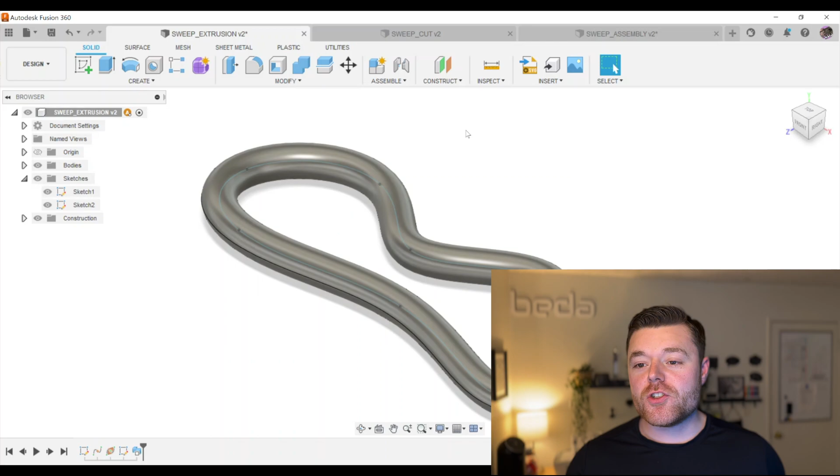For the first one, we're going to understand how we can use the sweep feature to create an extrusion. This is essentially just a simple spline that was created on a top plane, and then I created another plane along the path and swept a very simple circle feature.

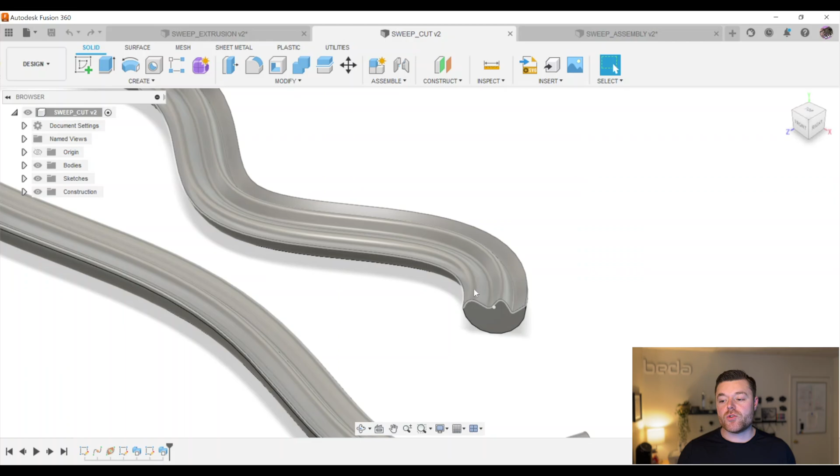We'll also learn, in reference to that extrusion we create, how to create an extruded cut along that same swept path. And then we'll end with something that's a little more complex.

This is just a Raspberry Pi enclosure that I pulled off GrabCAD. I'll leave the link down below in the description if you'd like to follow along. But you could assume that this is like a wire plug, and then we've got maybe a rubber piece or grommet that needs to go on top of it.

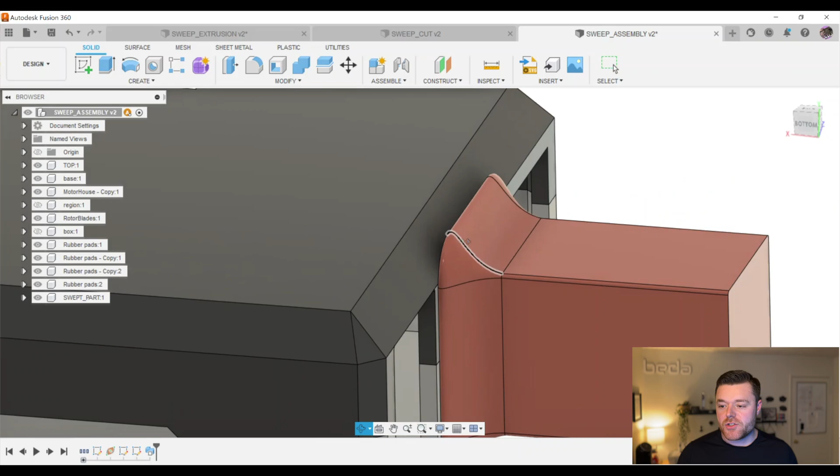But this feature was created solely using a sweep feature, so it could save you time in the long run if you needed to model something like this in the future. So with that being said, let's get started.

What we'll do is we'll go ahead and click New Design as always. We'll save this as 'sweep extrusion example.' And for my case, I'm just going to say YouTube.

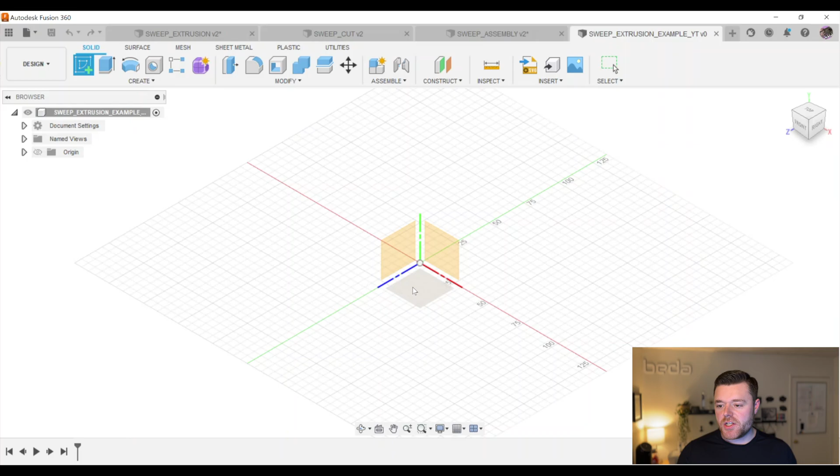And we'll go up here and left click on Create Sketch. We're going to left click on this top plane here. And we'll just create a fit point spline.

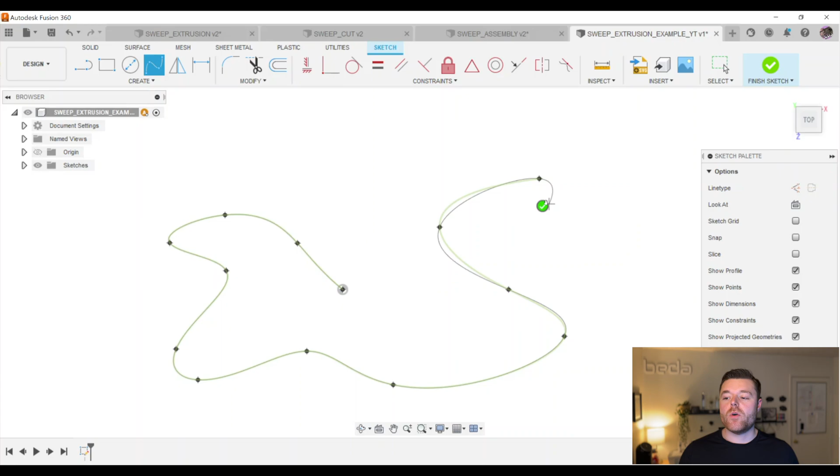So left click on fit point spline, left click on the origin, and we can just left click all around to give it some kind of direction that this sweep is going to follow, left clicking all the way around. Then when you want to finish, you can left click on this green check mark and hit escape.

Great, and we will finish sketch. So we've got this unique looking geometry here.

Now what we'd like to do is sweep a feature along this path. So this spline that we've just created is essentially a path that we will then reference. In order to do that, we need a plane to reference.

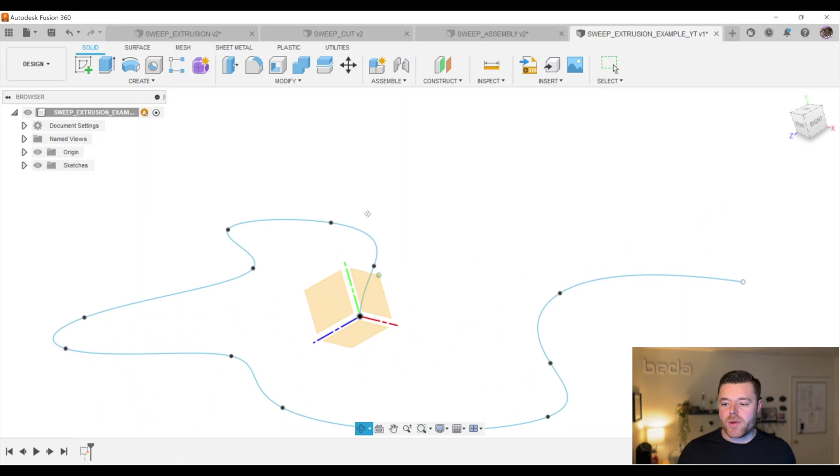If you show your planes, you'll notice that these planes, at least the top, front, and right planes that we have as our origin, aren't actually normal to the path that we have just created. That's on purpose, so that gives us an opportunity to learn how we can actually create a plane normal to the path that we have created.

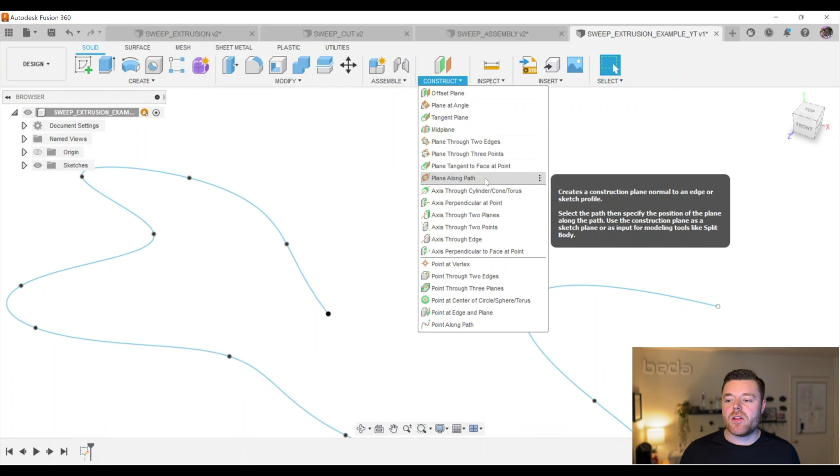So let's hide the origin. We can go up here and left click on Construct, under Offset Plane. Don't select Offset Plane, but there is a selection here that says Plane Along Path. So we'll just left click that, and then the path that we want to reference.

Then it gives us options - you want to keep tangent plane selected, keep proportional selected, unless you want to create a physical distance. For this purpose, we'll just keep it at proportional.

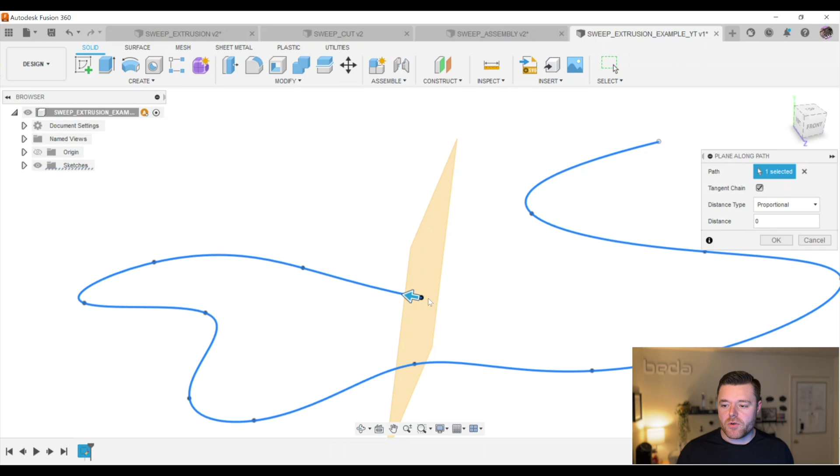At distance, let's just make sure that this is 0. What that means is it's just going to go right to the starting point, and this is going to be normal to the beginning of our path, which is perfect. So we'll just select OK.

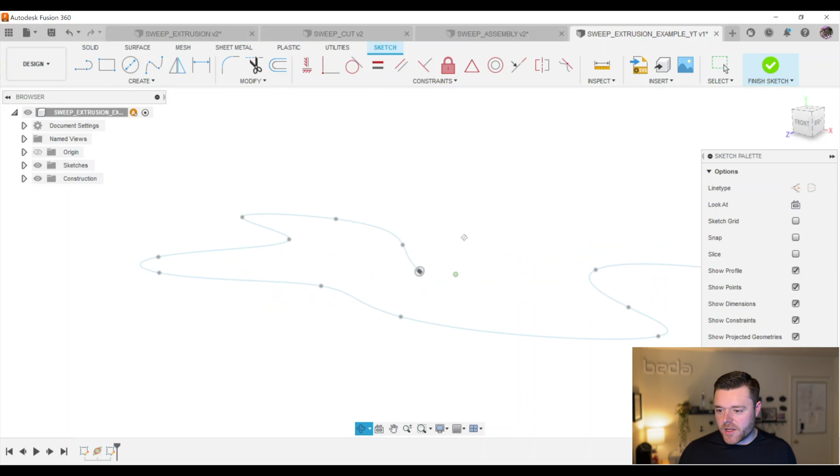There we go, so this is going to be our sketch plane. So we will left click on this plane and then left click Create Sketch. And then if we do Shift and middle click, we can kind of reorient the sketch just to make sure we're referencing the correct view of the sketch.

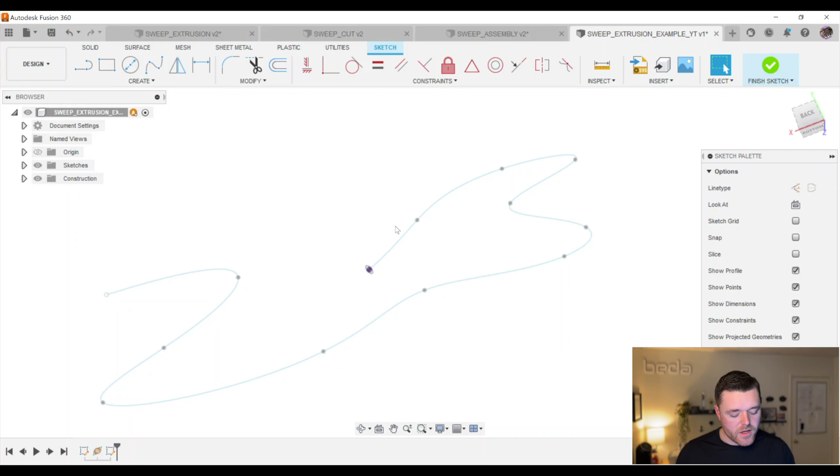And what we want to do is just do P for project, and we're just going to project the point and select OK. For the purpose of this example, we'll just do a circle.

So we can do C for circle right at the origin. And if you can't select it because maybe you've rotated it so much, you can just do 'look at' - go to your construction, select the plane, and then you'll look at it.

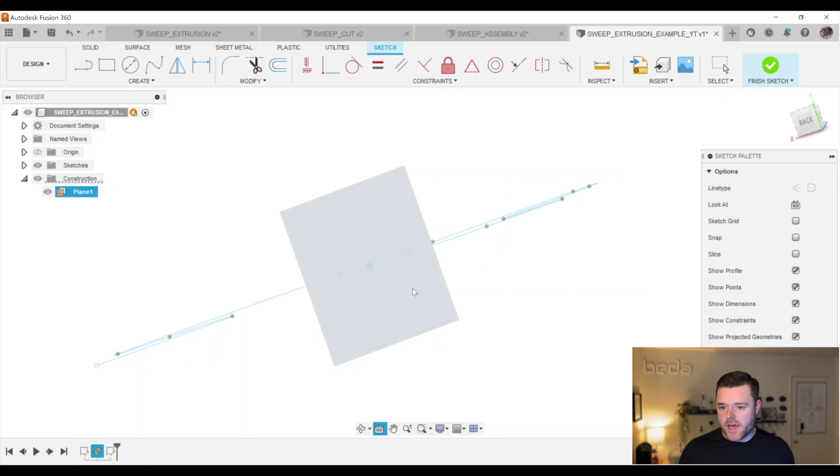Look at the plane. Okay, there it goes. So look at the plane, and you should be reoriented normal to the face of the sketch. C for circle, left click on that point, and we can just make it, left click again, escape.

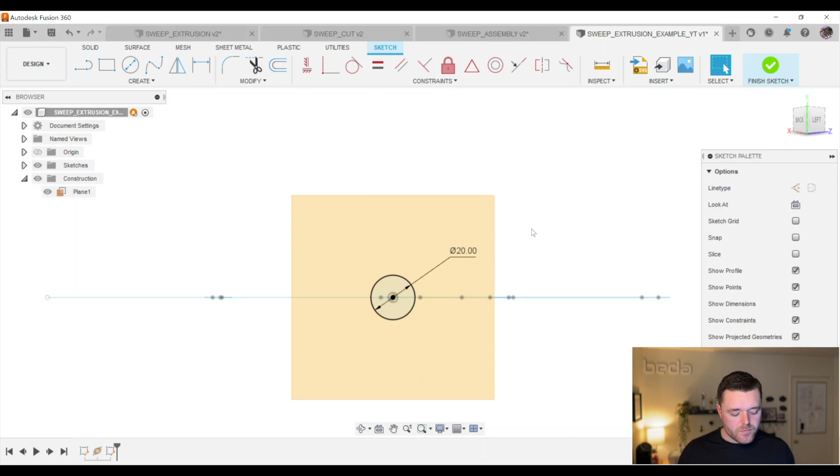D for dimension, we'll just make it maybe 20 millimeters. So I left click on the circle to get there, 20, then hit enter and escape. Shift middle click, and we can hide the plane. Over here in construction, we can just turn construction off.

And we've got the circle. So if you can visualize this, what you'll see is this circle will basically sweep along this entire path. Pretty neat. We'll left click on Finish Sketch, left click on the circle so it's shaded.

I almost clicked Extrude. We will click Sweep, and then it gives us a couple options here. So we want single path to be selected. We want the profile—we've already selected it, but if you had not, you could select your profile and it would say one selected.

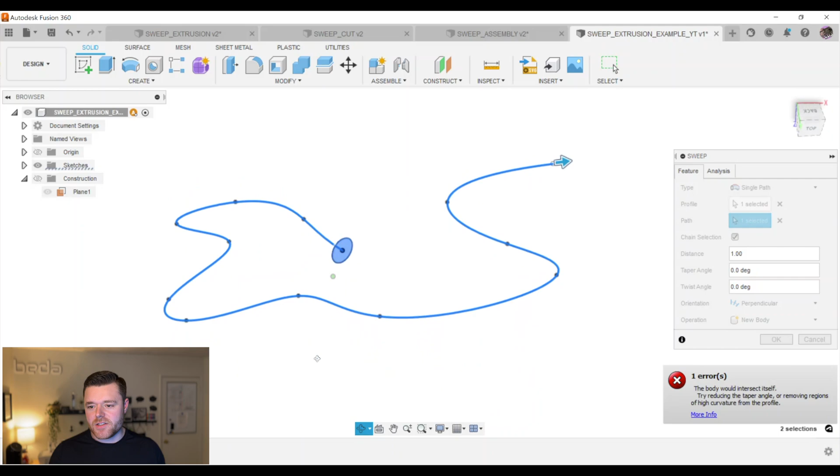And then the path we want it to follow is the spline that we just created. You know what, I'm actually glad this happened, because this gives us a real world example of what might happen to you when you're trying to create a sweep along a path.

This says it would intersect itself, and I'm guessing it's probably right at this part. So this means the diameter of the sketch we just created is too large, and the curves we're trying to make it follow are too narrow. This doesn't give us enough curvature in this turn to actually create a 20 millimeter diameter circle out here.

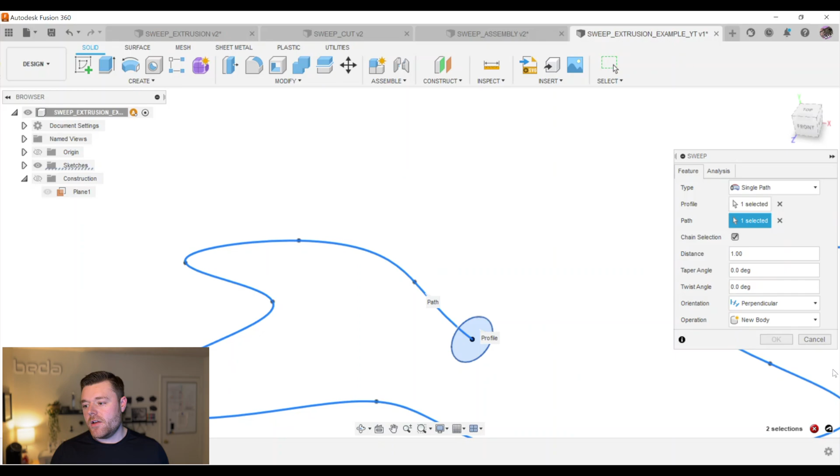So a couple things we can do. Let's press cancel, left click on cancel. Because these aren't defined, we can just move them—we didn't actually create dimensions for these sketches. So what we can do is not even enter the sketch, and move these organically.

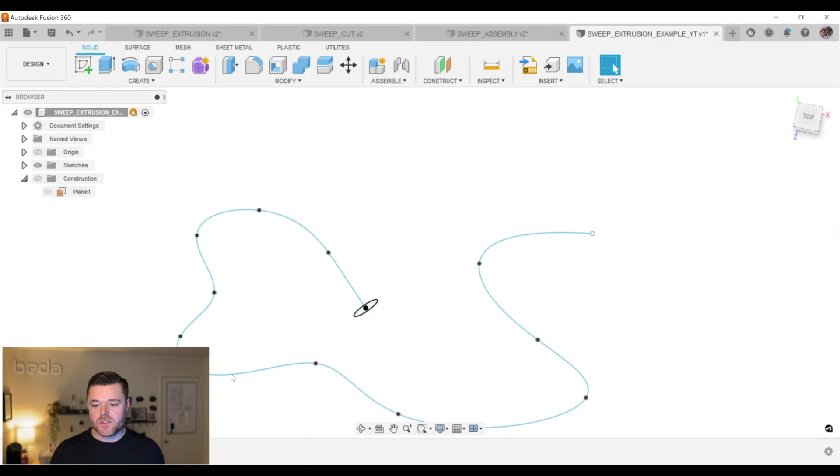My guess is that just by making this curvature a little wider, it's going to give us enough space to create a 20 millimeter circle that can go through this path. So let's try it one more time.

Left click on create. And if that doesn't work, what we can also do is downsize the size of this sweep or the feature we're trying to create. Let's go back to create, select sweep. Profile again is that circle.

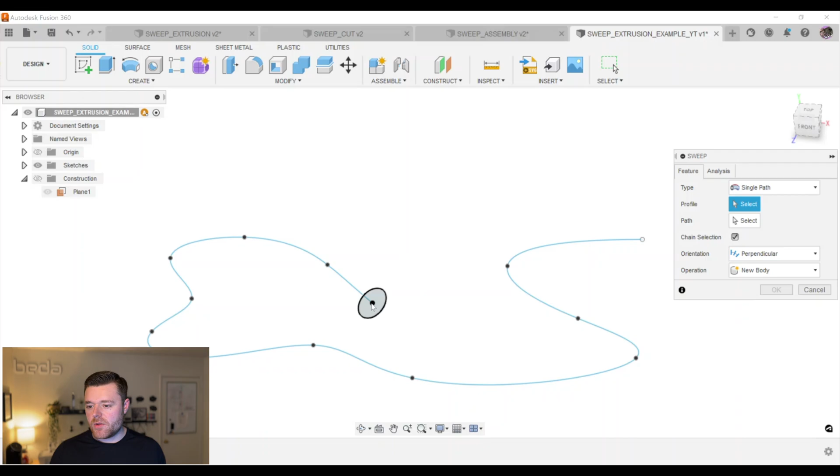The path that we want is this path. And great, see now it works. Let's go ahead and select OK. So this is our swept extrusion—this is our first example.

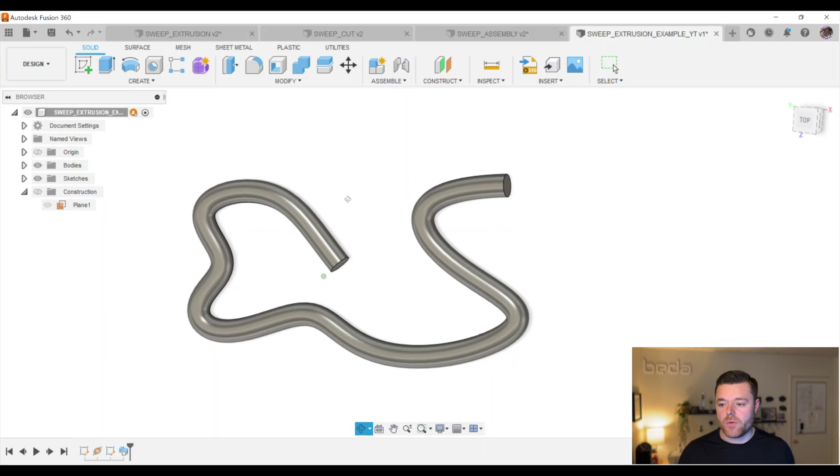Looks really neat. You can even do some 3D sketching and pull these splines up if you'd like to. Let me know if you'd like to see a video on that later down the road. But pretty high level, easy method to create complex geometry in one simple feature. So all is well there.

What we will do is go back. Let's save this at the top left, click OK. So this is the one we want to copy. Left click, then right click, left click on copy, left click on copy again, and it duplicates it down here. Great. Don't know why it's not letting me rename this.

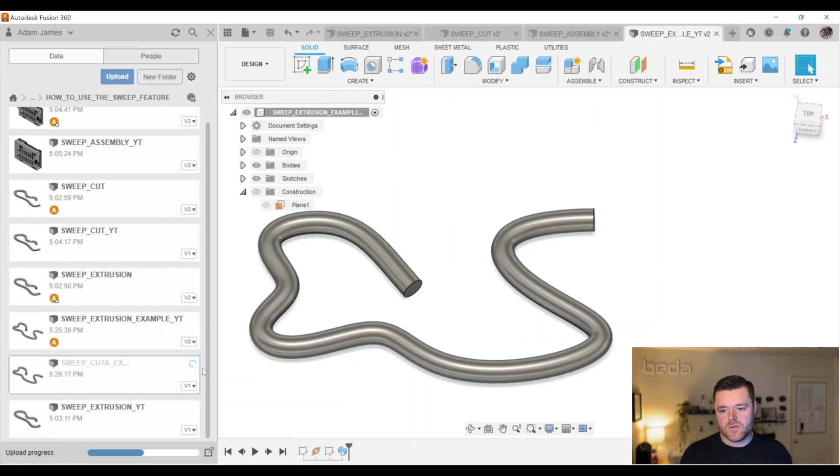Cut, sweep cut example, YouTube. Okay, perfect, okay great.

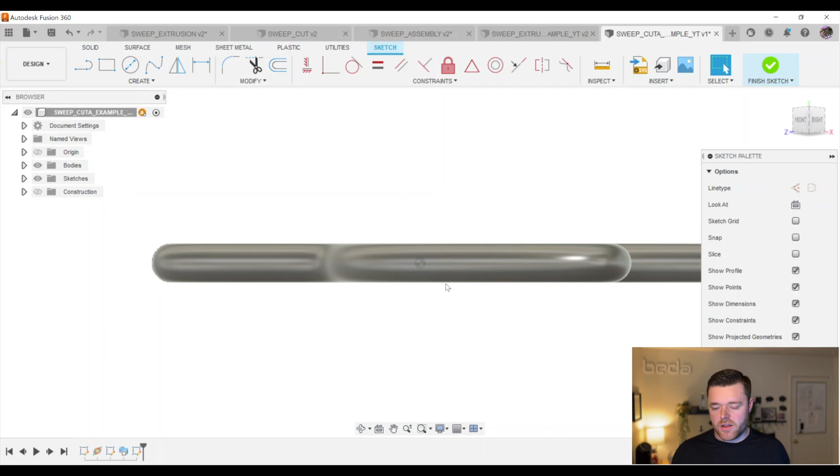So now we've got our copied model. And we don't actually have to create a plane this time because we already have a flat face. So what we'll do is left click on this face, and then left click on create sketch. Then we can shift middle click again to get a better view of what we are referencing.

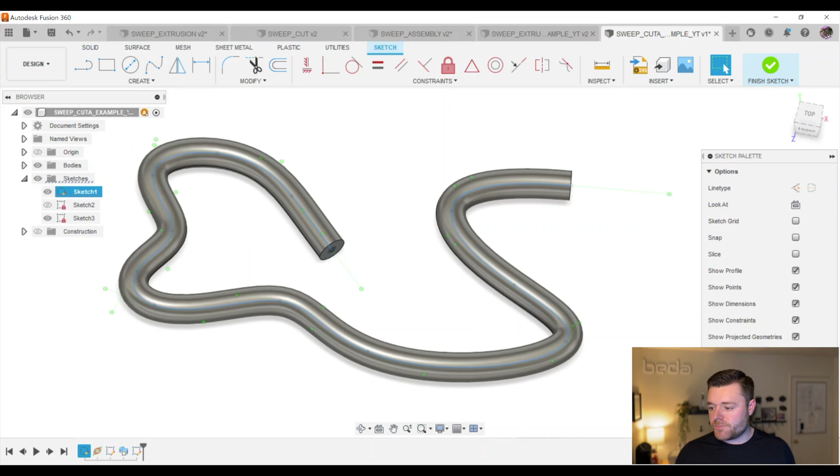Let's do something here. Left click on sketch one, because that allows us to see the swept profile we were referencing earlier. You can hit P on the keyboard for project, select this circle, left click on OK. Then we'll use a spline again.

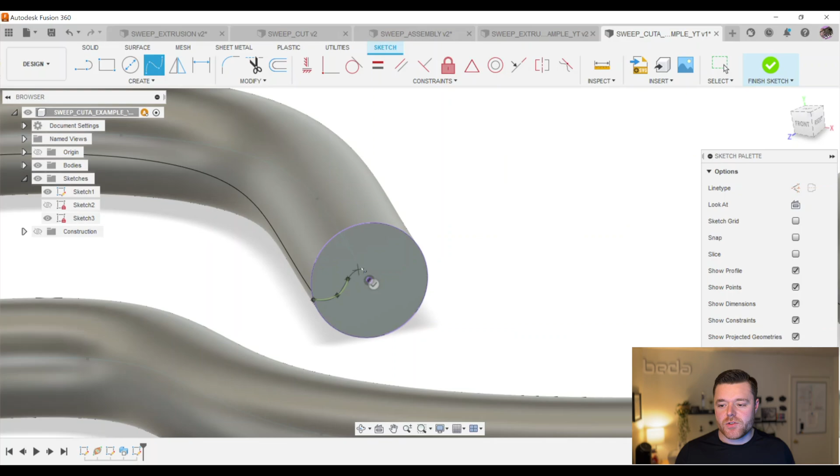I just like using splines because it exemplifies how well Fusion does at sweeping complex features. So we do this, that, and maybe go all the way up here, left clicking all the way around from the outside of the circle we projected on one side, to the outside of the circle on the other side. Then we'll hit escape.

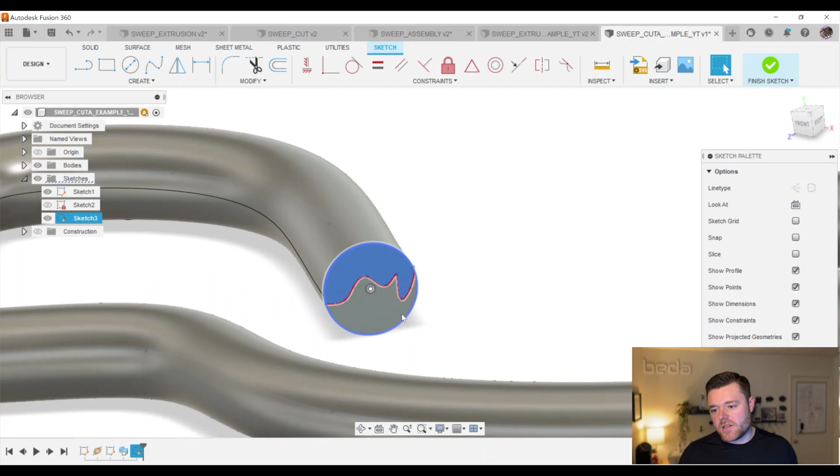And then we can select this feature—kind of unique geometry there. Left click on finish sketch. And we'll go back up to create, and go to sweep.

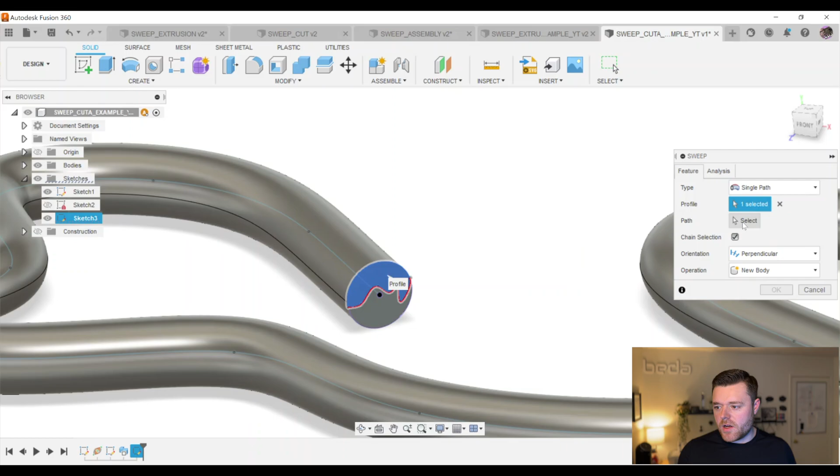The profile we want to sweep is the one we just sketched—this top part, you can do the bottom part if you wanted to. Again, keeping single path selected, we're going to manually select path, and then the path we sketched with the spline earlier.

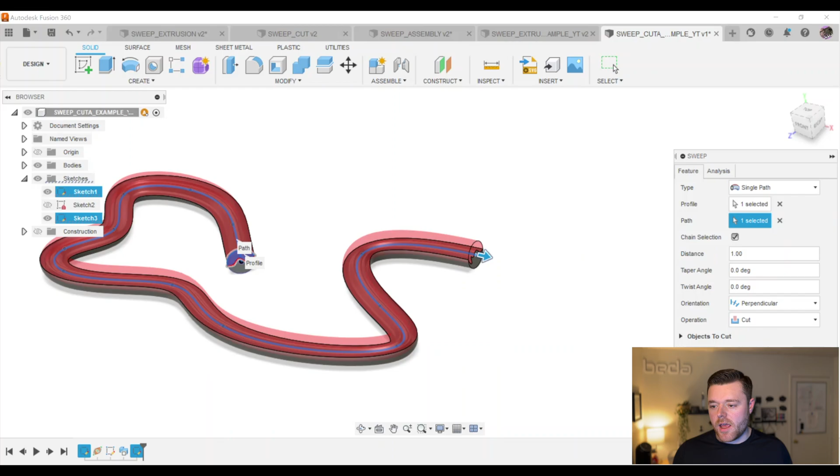And there we go. It automatically changes the operation down here to cut. If it does not, you can simply change that by selecting it in this tree here. Once it is selected on cut, we can just select OK, and we're all set to go.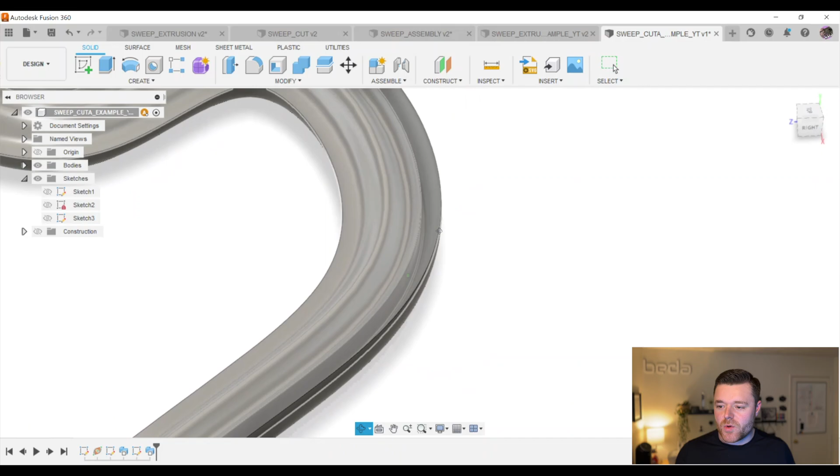It kind of made this like a cookie cutter, kind of cookie dough extrusion that's been laid flat on a counter or something. I don't know, just using my imagination, I guess. But it looks really good. This is a complex feature sweeping along a complex spline path, and it turns out really good. All of these features are normal to each other along the path, and it goes all the way through.

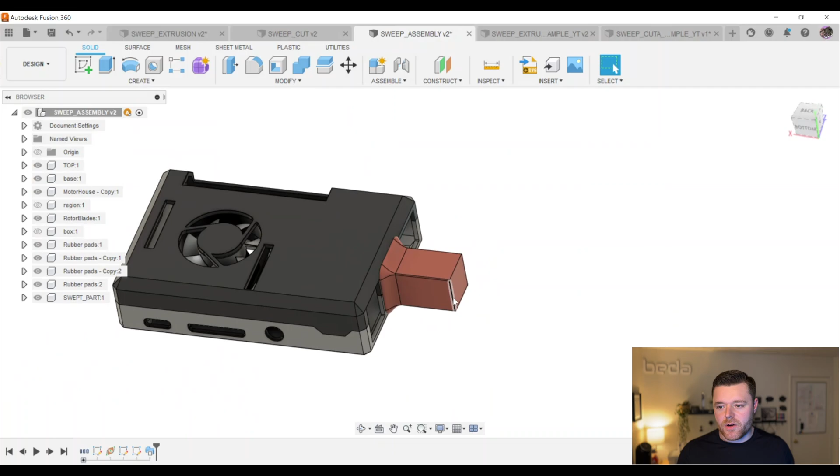So that looks great. But what if we are in an assembly, in a realistic CAD environment where, say, I don't know why the Raspberry Pi isn't even shown in here, but you get to see the enclosure then. So this example, usually this is like a USB or an Ethernet cord that gets plugged in here. So I just quickly mocked up a little part that gets plugged in there.

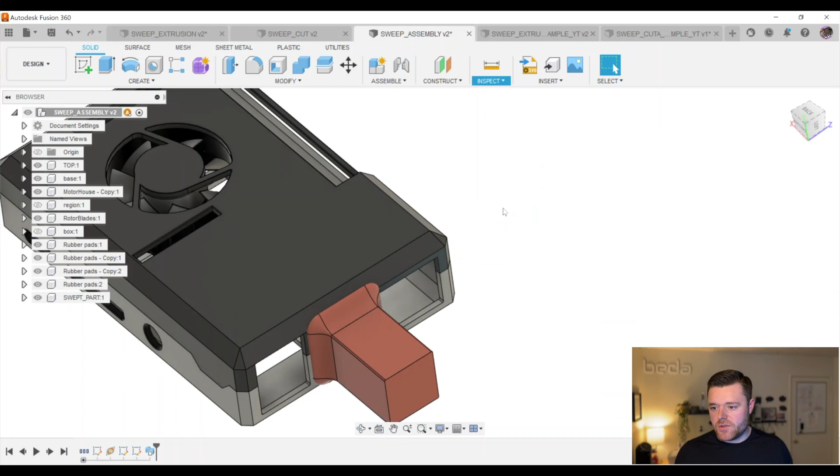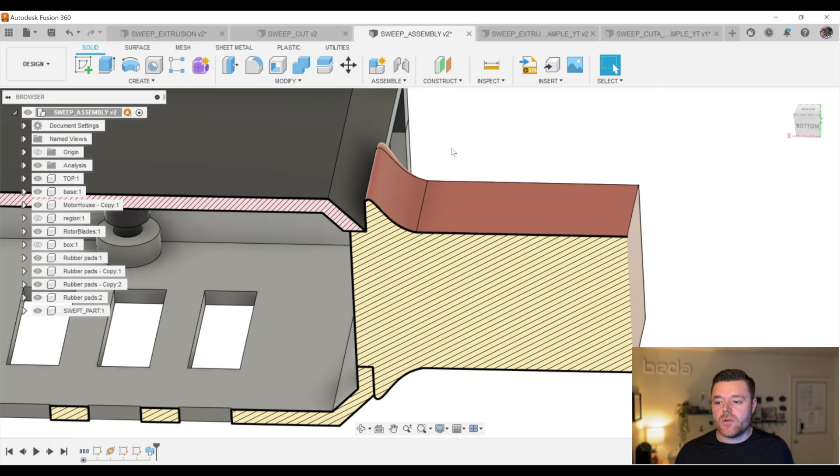Let's go into section analysis so you can actually see what's going on. There we go. Hypothetically, something would be plugged in there, and maybe this plug has a rubber part or something that comes up and over to seal. Who knows? But this is my hypothetical example, and I think it's a good opportunity for us to try modeling using assembly features and references to other parts.

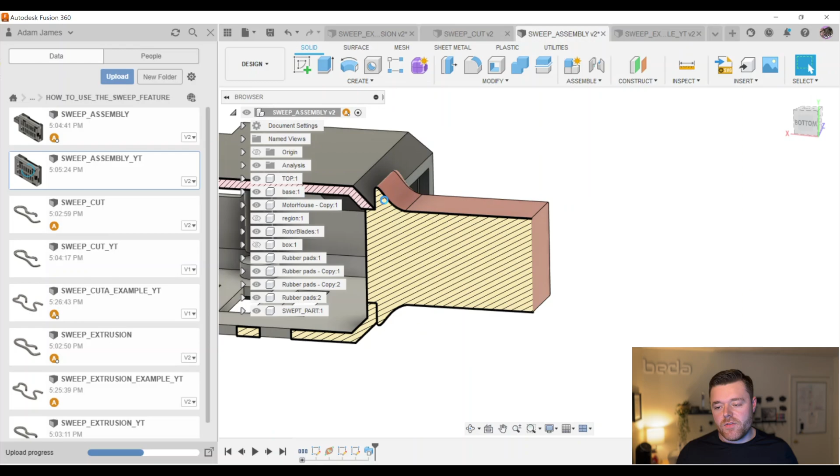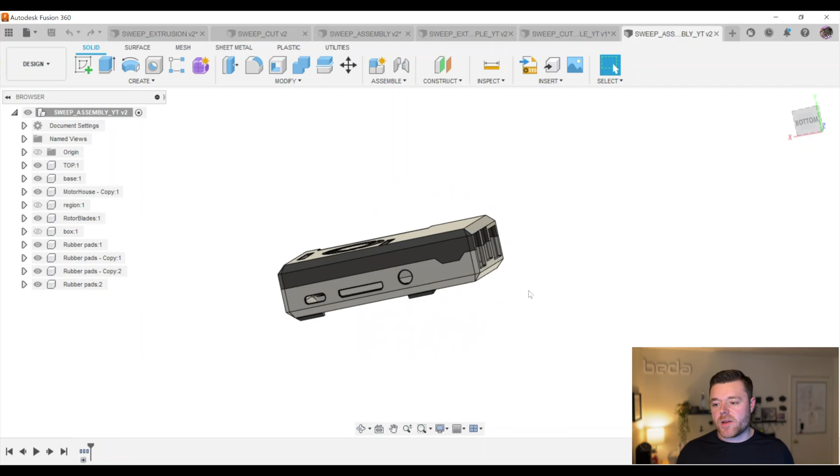So I will open the sweep assembly YouTube example. Just open this. Again, if you'd like to follow along with this, you can check out Ankit Jangid. I apologize if I butchered your name, but he has a Raspberry Pi 4 case CAD model for free on GrabCAD community. I uploaded the SolidWorks assembly files along with all the parts, and it worked just fine.

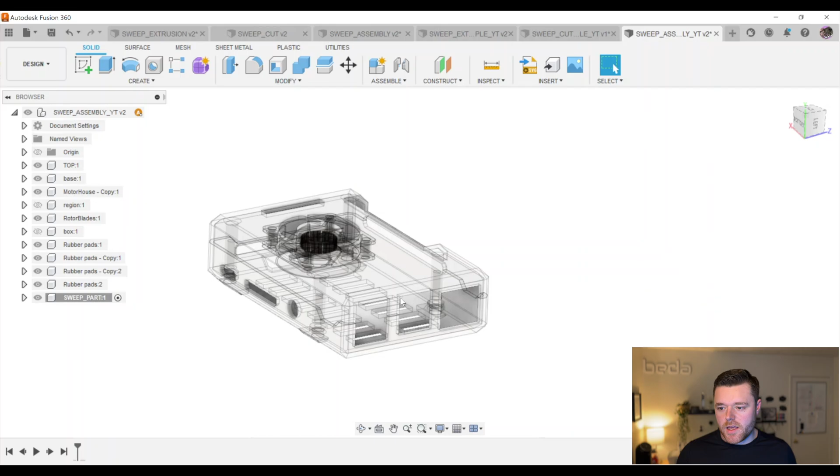Now that we're in the assembly, you can create a new component. I'll just name this sweep part and hit enter. Then I'm going to hide this top one. I'll left click on this top component here, and then it underlines it in the tree. Left click on the eye to hide it, and we're all good to go.

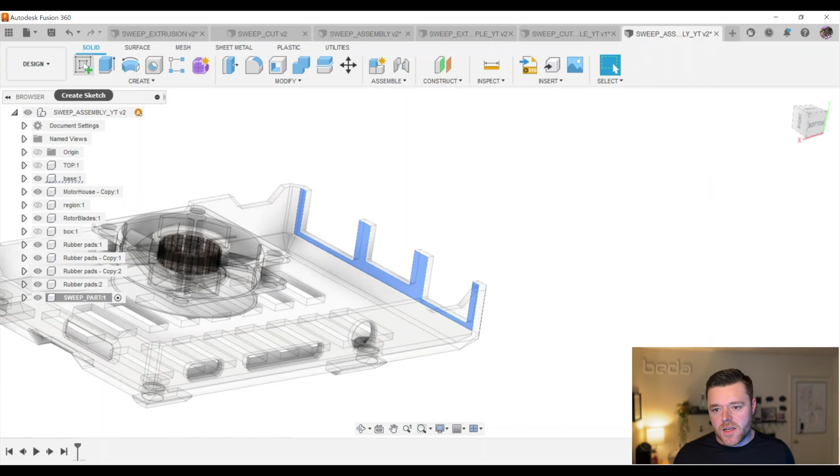Shift middle click, and we can left click on this inside wall here, because that's the sketch plane I want to reference, and then select sketch. Now I don't want this sketch to actually be oriented like this, I want to have it go this way. So what I'm going to do, easy enough, is just hit left, and I'm oriented on the other side.

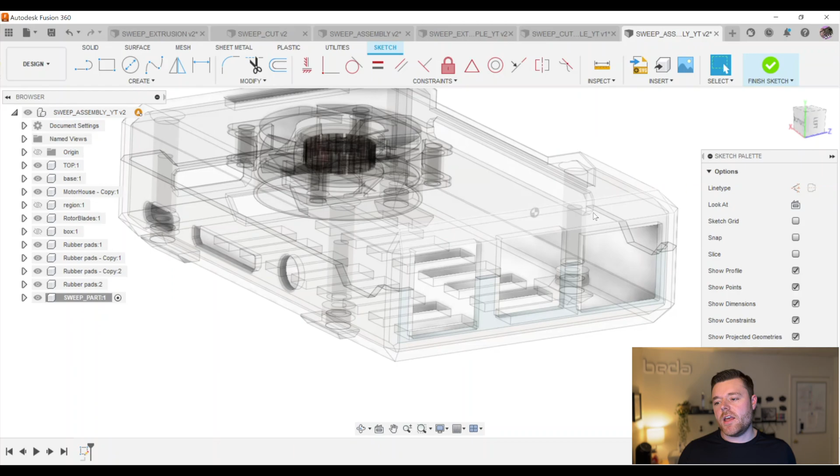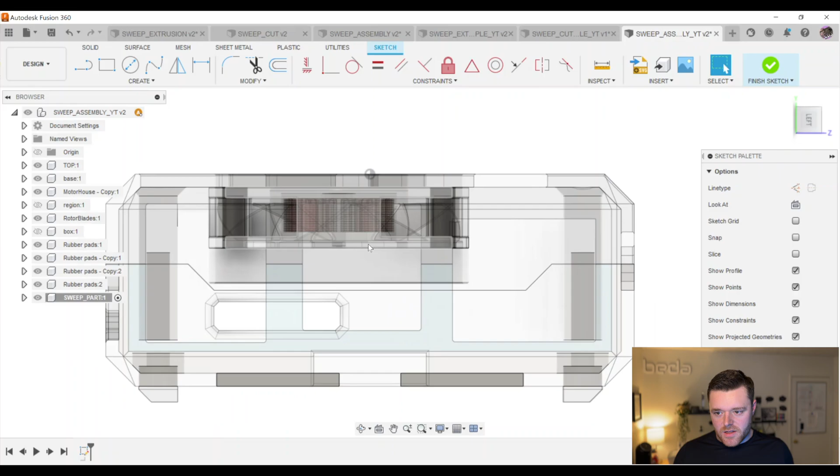That's great. Now let's show the top. By removing the top and then selecting that inside, it gives me the option to select this inside face in Fusion. Fusion's a little particular in the ability to select faces that are hidden by other features, so that's exactly why I did that. Let's left click on the face again. I'm also going to hide this fan here as well. So this motor house, click, and okay.

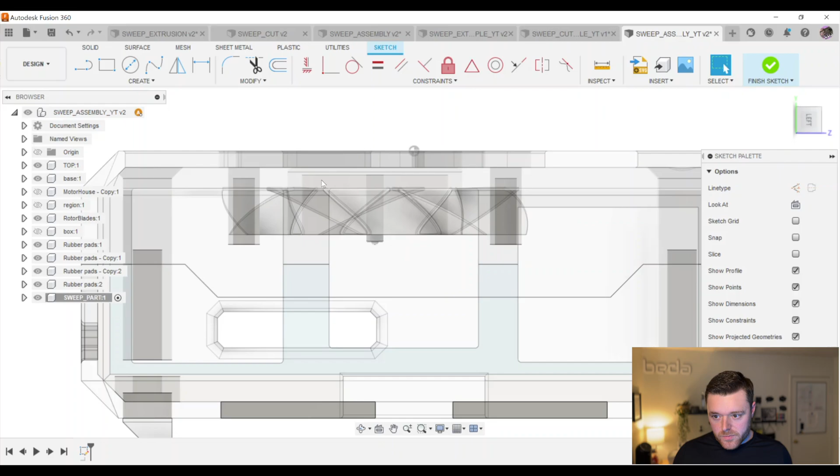So what I'm doing here is I'm going to create a simple extrusion, say this part that is coming out from the enclosure itself, so this will be like our plug. I'm just going to do project, and I'm going to use the features that already exist here. I'm going to select this. I'm going to left click on this. I'm going to left click on this. I'm going to left click on this, and then hit OK.

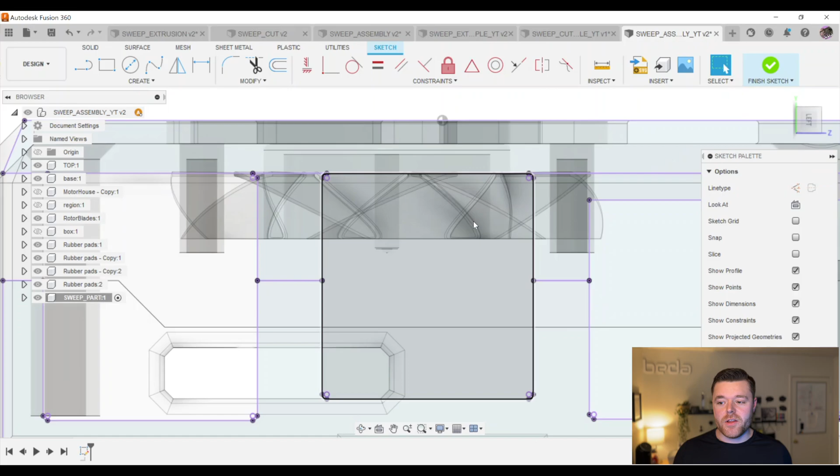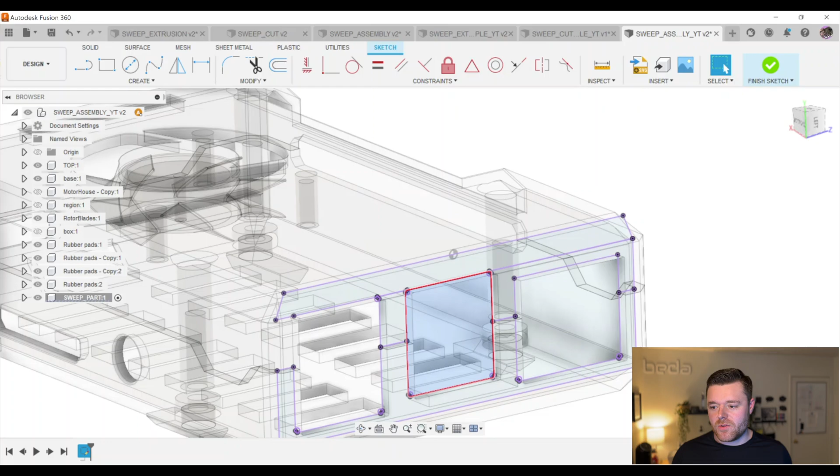By doing that, it projects all the lines that already exist, so I don't have to go back and sketch these. Usually I would offset this by maybe like 0.1 millimeters so that there's no interference, right? But this isn't actually a functioning model, so this is just for sweeping references to understand how this feature works. This should be just fine for the purpose of this example. With that selected, I'm going to hit extrude, and we're just going to drag this maybe out here. So that is like our wire.

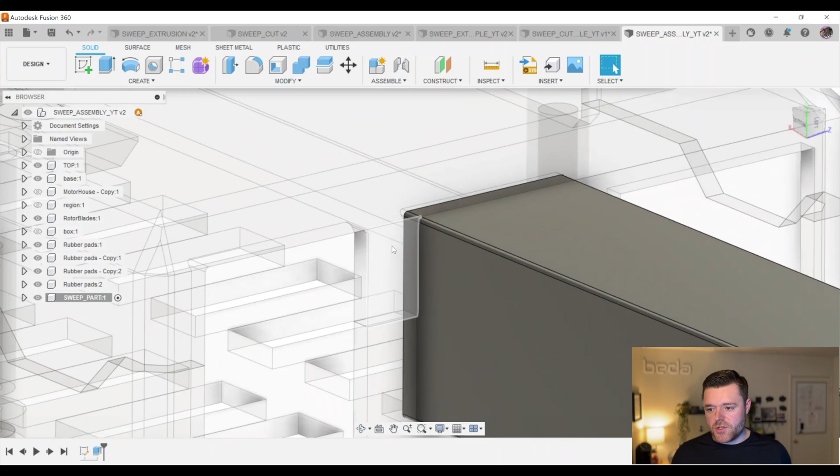Now, with this, we want to make sure that we have activated this component. We are going to sketch on the outside of this surface. And I'm sketching on the outside of this surface so that we can project the sweep profile geometry that our feature is going to reference in the next step.

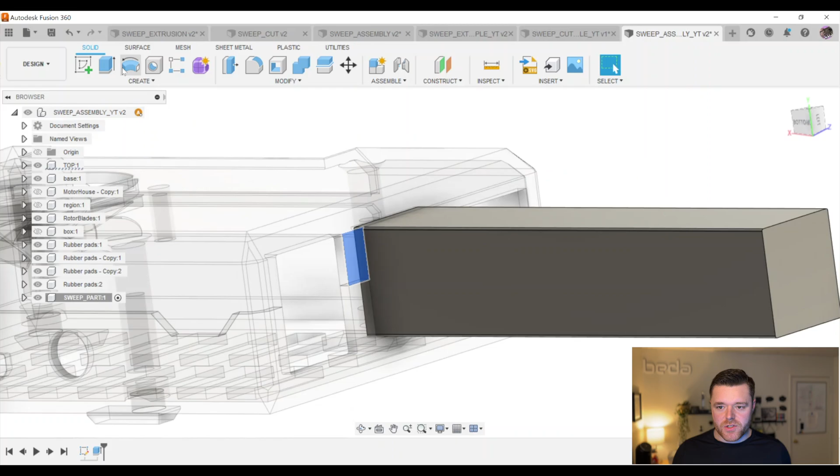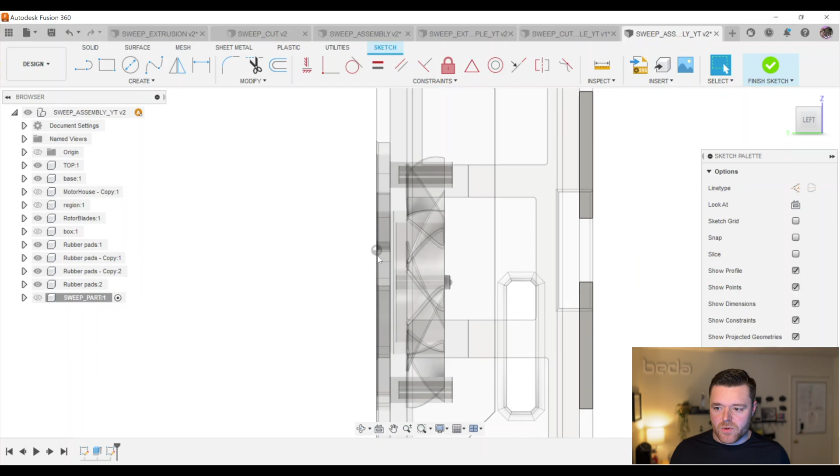So let's left click on this housing, left click on sketch. I'm going to hide the swept part, and we're going to do the same thing. So P for project, select this face, select this face, select this top part, and select this face, and select OK. And then it says the object is not visible. Well, that makes sense because we hid the part. So let's show the part again.

And it looks like I forgot to project this face as well. So let's do P for project and then click OK. So great, that looks fine.

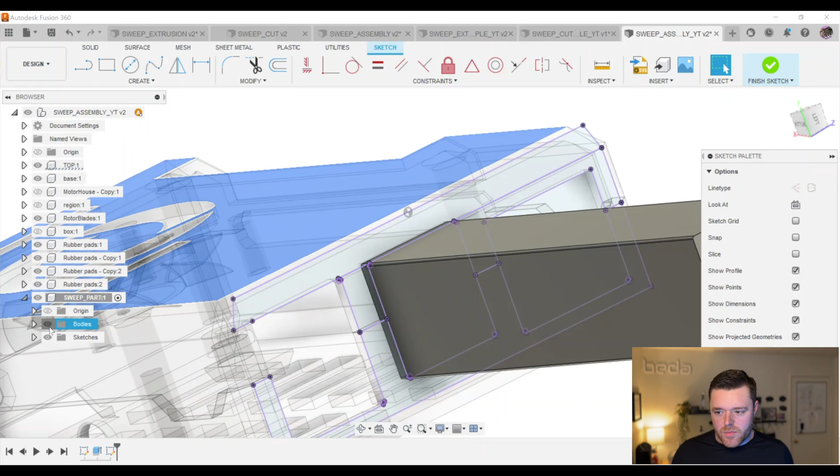Let's hide the body. Left click on the sweep part and then left click on this eye for the body. And then we'll click finish sketch.

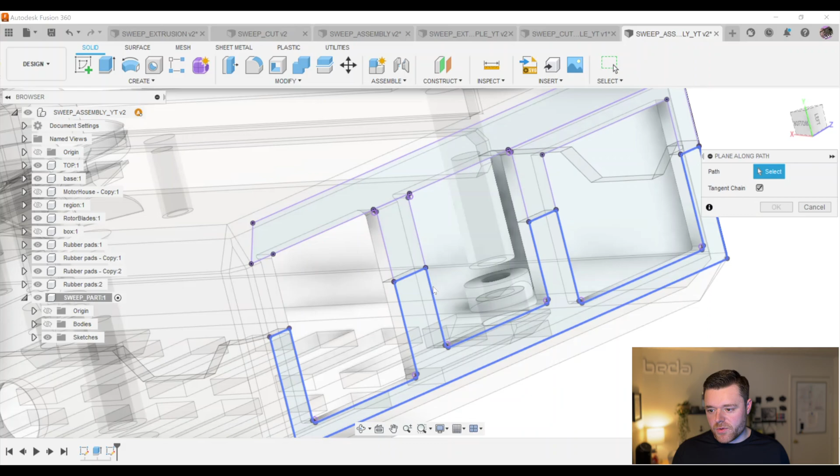Similar to what we did in the examples, we want to create a plane to reference. So we'll do construct plane along path. And then very similarly, we're just going to... actually, I don't want it to reference this entire path, so I'm going to cancel.

Go back into the tree here. I'm going to right click and do edit sketch. And because this is all linked, I'm just going to use this trim geometry feature and get rid of—actually, let's see if I can just left click and hit delete. Looks like I can do that. Finish sketch. Okay, great.

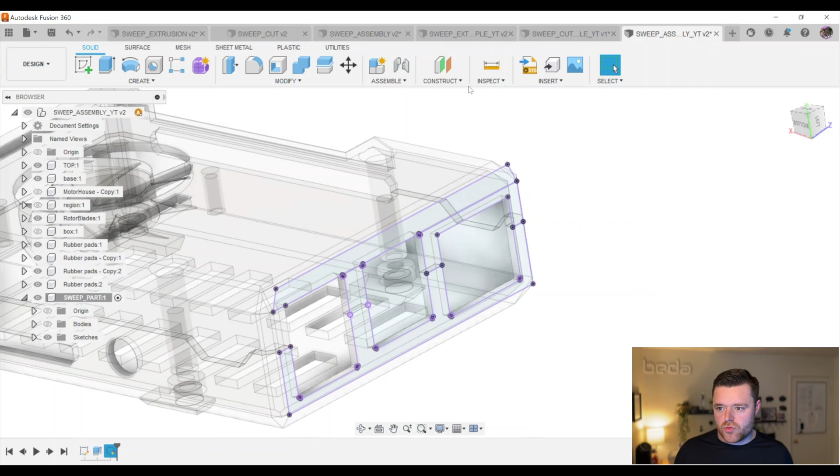Shift middle click to turn the model around. And then let's see if I can go back to construct plane along path. Great, now we've got this kind of gap here, so it should—great, it did exactly what we wanted it to do.

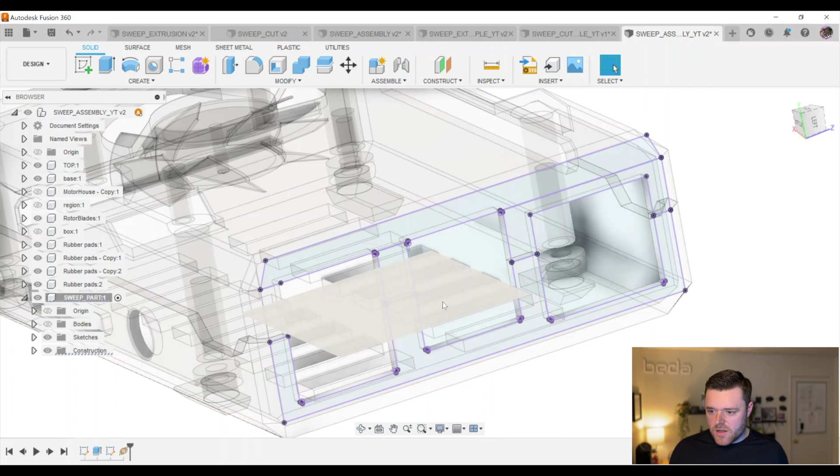We'll hit 0 because we want it at the top there. Awesome. And we will show the body again.

So what this allows us to do is reference this path. This plane is now normal to the path that we want our sweep feature to follow.

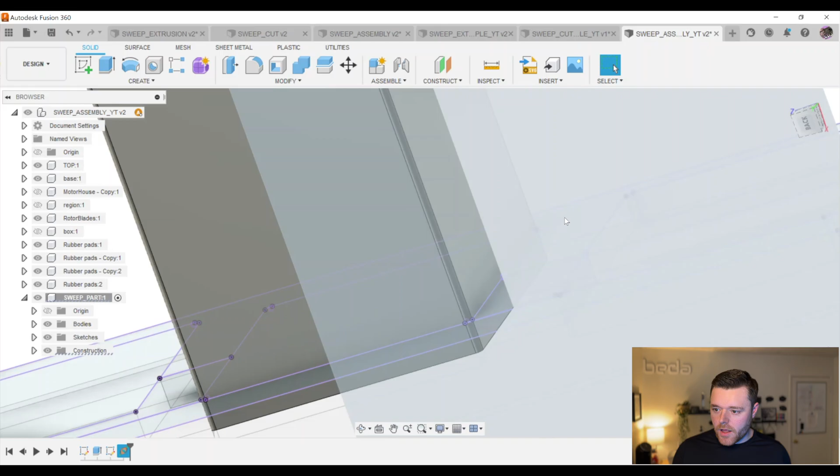And we will left click on the plane, left click on create sketch. And then I'm also going to do P for project. We want to reference this wire or this feature as well.

Left click on OK. And again, we'll just do spline. This could be whatever you want—let's just say it's kind of this rubber grommet or something that comes on here.

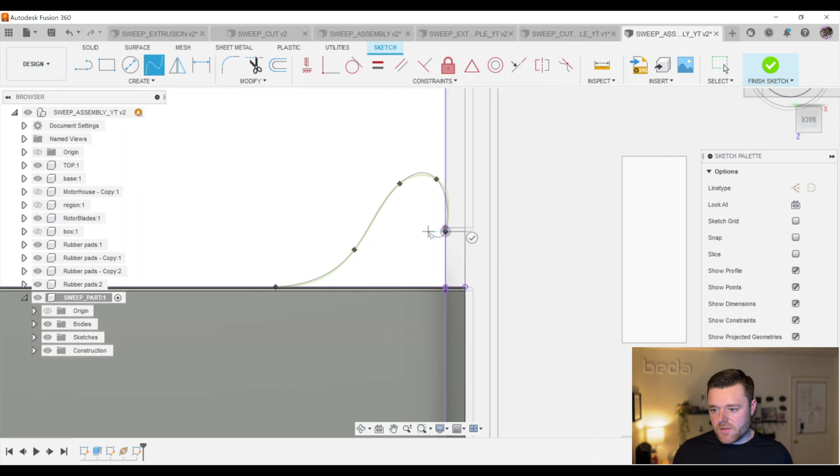Click on that and then escape. And that did not actually let us sketch that. Let's do P for project—project this line as well. Click OK. Go back to fit point spline. Let's try this one more time.

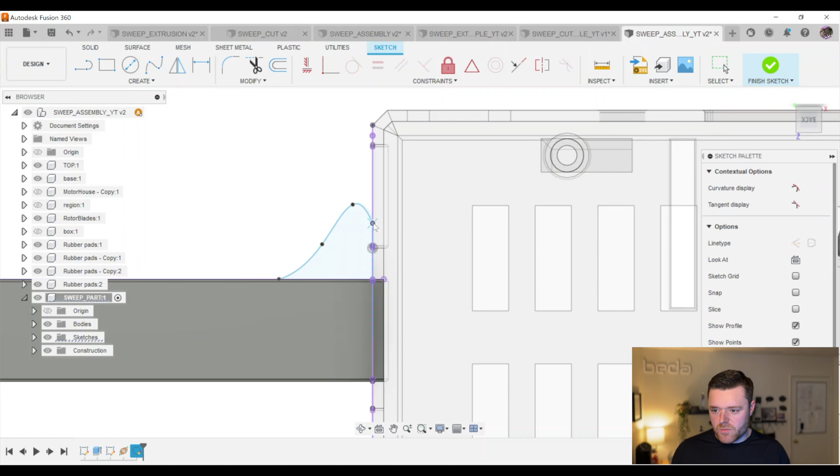And left click and hit OK. Escape. Great, there it is. I'm just going to bring this down a little bit by left clicking and dragging. That looks good. Hit finish sketch.

Great, so this is our feature. Of course, I'm just going to bring this in a little bit because that's not realistic—this would interfere with that little hole, right?

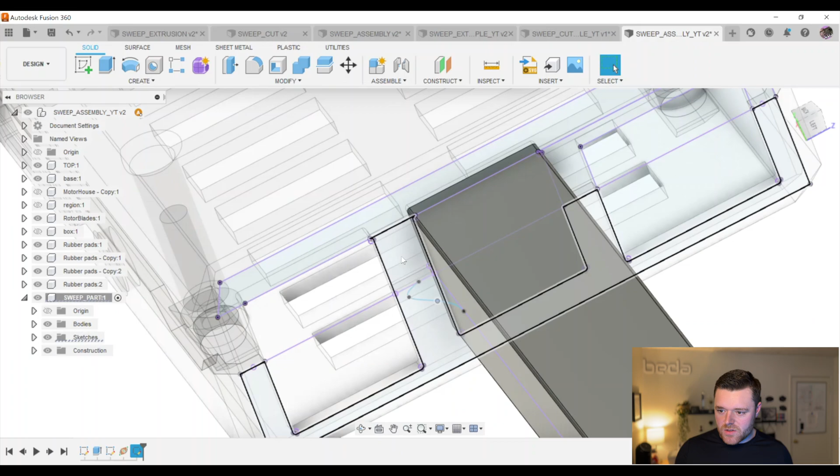Okay, great. Now the goal here is to have this sweep along this entire path. So that's the overall goal. Let's see if it works this first time. Might have to go back and clean up this sketch, but let's see if it works.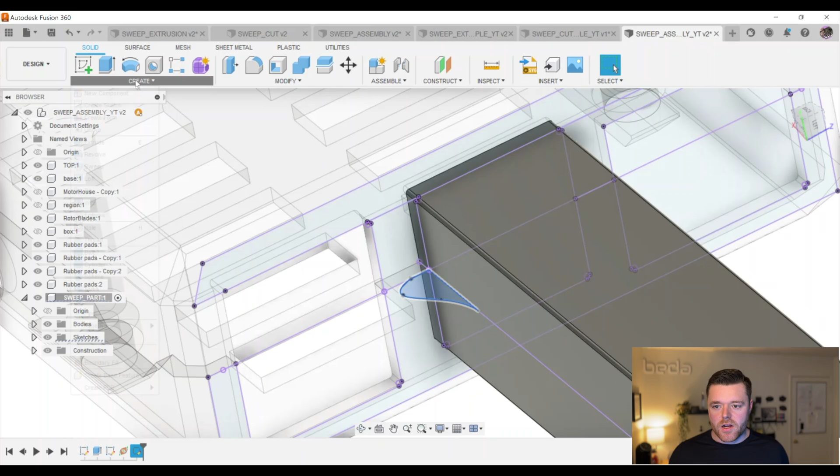Left click on the sketch that we just created. We'll go to create, sweep, path. Yeah, I'm thinking we got to go back and clean that up a bit because it doesn't know—it's only able to follow this up until it gets to the point of the other one.

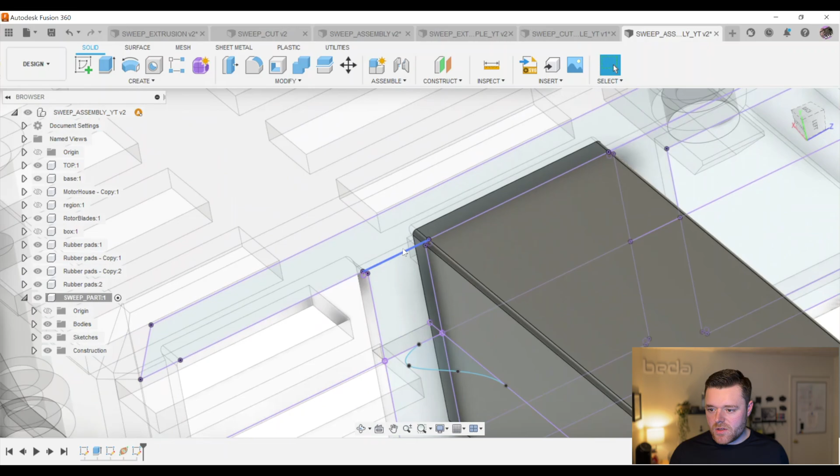So let's do cancel. Let's go back here, hide the body, and hide the other sketches, and edit sketch 2. Let's go clean this up.

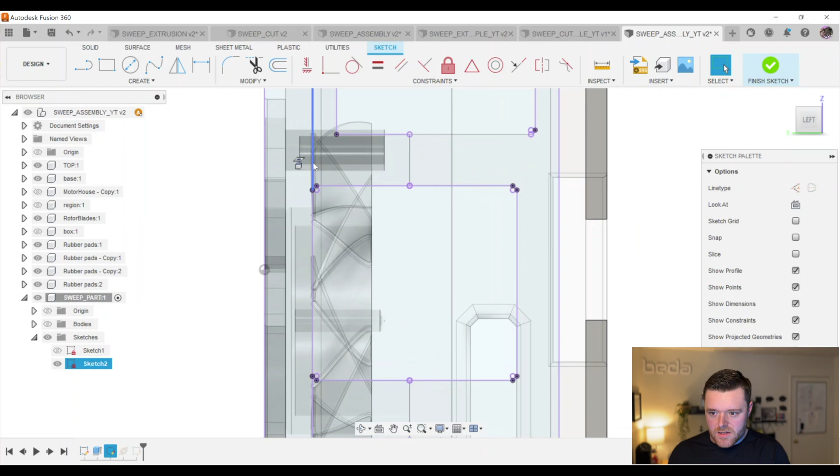And we will just left click, delete, left click, delete, repeating that several times. And I think that should be all we need to do. And then we'll left click on finish sketch.

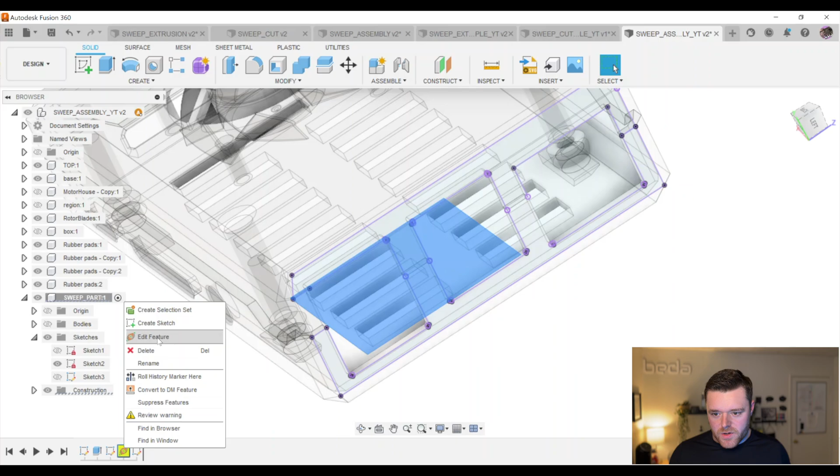Now it says plane 1 is not referencing what it needs to. It's okay, okay—there we go.

All right, now let's show sketch 3. Left click on the shaded sketch that we just created. Let's go back to create. Let's go to sweep, left click on path.

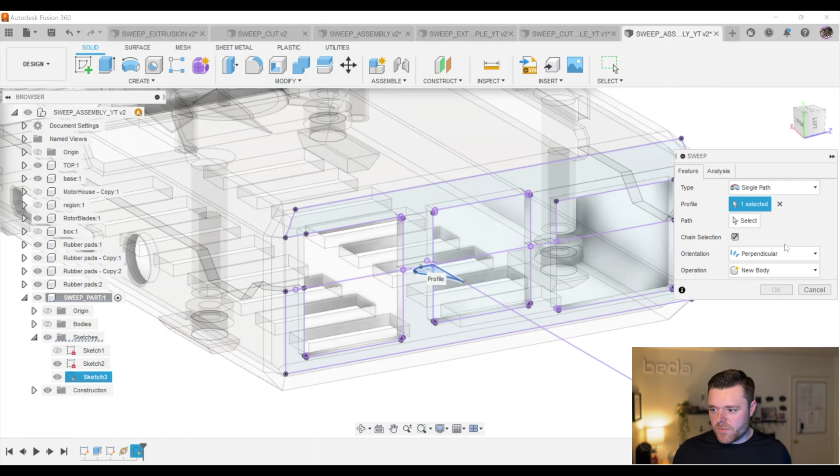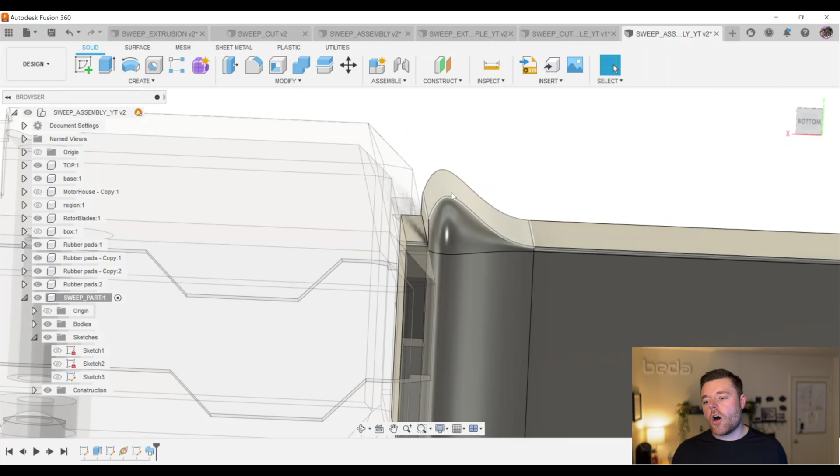And show the body. Perfect. Left click on OK. And there we go—that is our complex sweep referencing other geometrical features in an assembly.

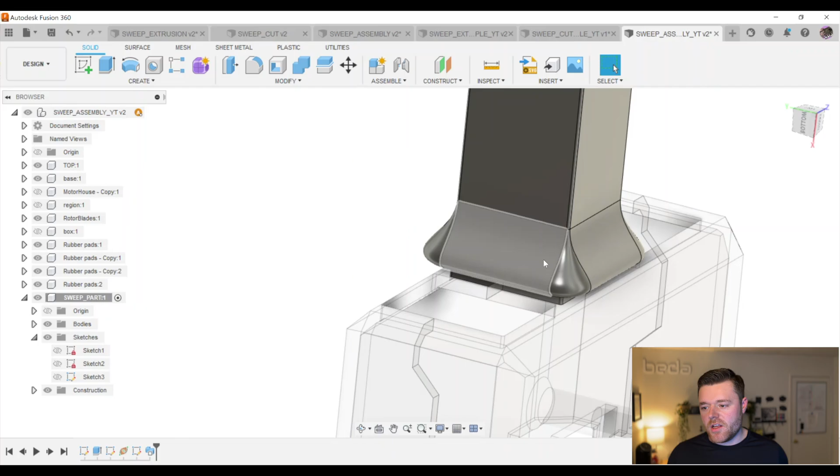I know that was a little more complex than I usually do in a step-by-step tutorial, but I just wanted to show you that this can save you, instead of doing a simple extrusion, doing another extrusion, then creating a plane in the middle of both of these, and then doing another sketch to create an extruded cut. You can do this using an extruded sweep feature in a complex assembly within Fusion 360.

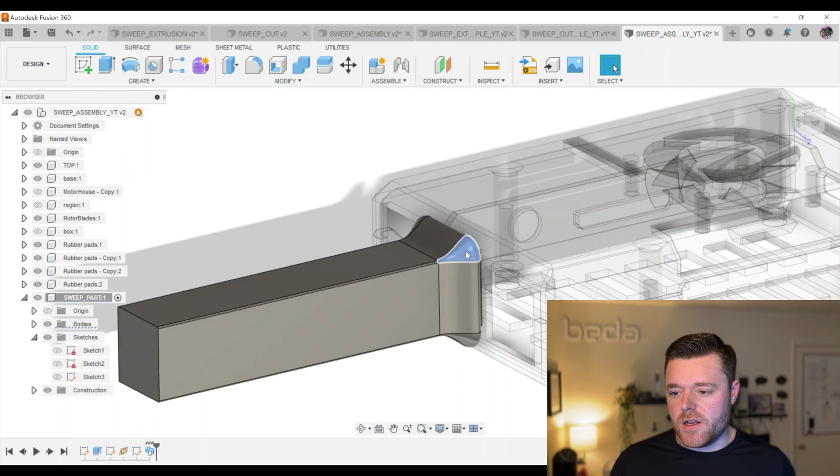So pretty neat, but I'd be curious to see what you all use the sweep feature for in your assemblies.